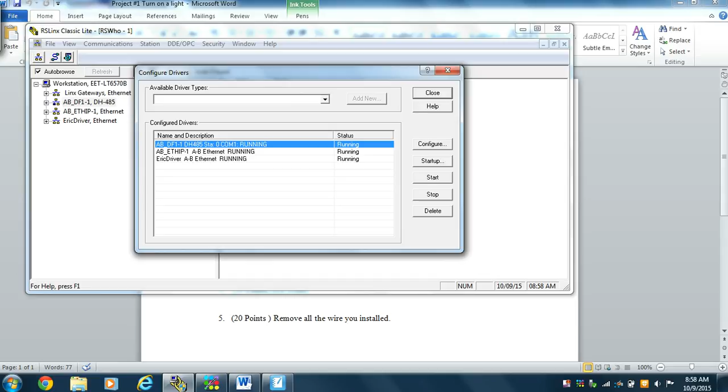Okay, so the first thing we're going to do is establish communications. So we're going to open up RSLinx, which is our communication link. Go to our DF1 connection, go to the squiggly line in the middle, and do an auto configure. And this will configure us to talk to that SLC. Alright, so our automatic configuration is successful, so that's good. We close that. The RSLinx program has to stay active. So we're going to minimize it, but keep it running.

Then we're going to open the RSLogix 500 program. And then, let's see, okay, so I got it. Then what we're going to do is go to communications, who active online. And we're going to click on the 5/03 that we're hooked up to. Obviously I ran a wire up to that guy.

This is a DF1 connection we're doing, and it's channel 1 because I'm talking from this computer directly to that unit that's on a network with another 6 of his friends, but I can only see one of them because I'm coming in from the serial port. Okay, so I'm gonna say OK, and I'm going to create a new file. What this is going to do is bring into my 500 program everything associated with the 5/03 microprocessor that I'm connected to.

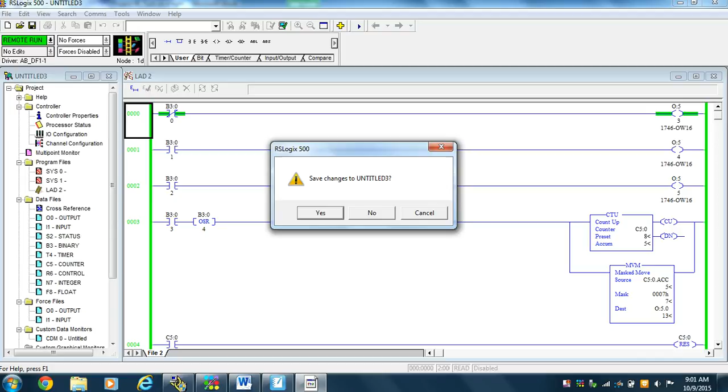And patiently doing so. And currently there is a file there already, and we will go to offline because we want to make a new program. And I'm going to say no. We probably wanted to say yes there. We'll find out. Now I'm thinking about it, but we'll see if no worked.

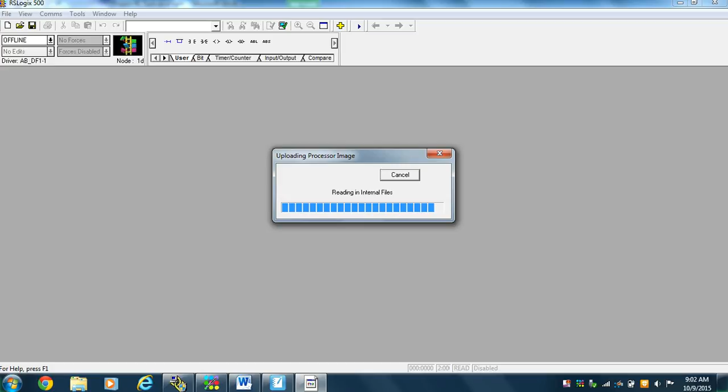Uploading is the process of bringing things from the programmable logic controller into this computer. Downloading is the process of things leaving this computer and going into the microprocessor.

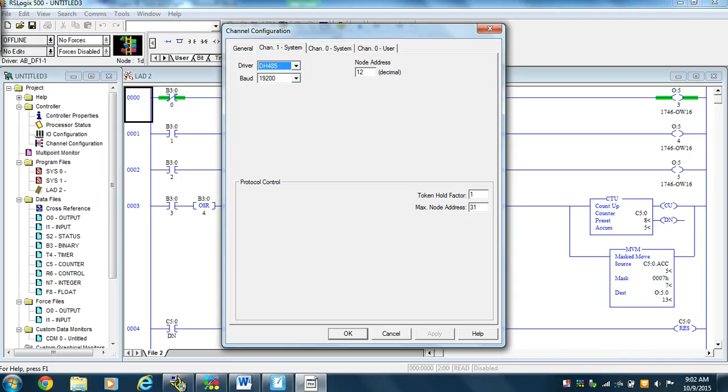Okay, so we're offline. It says that we're channel 1, node 1 for the DF1 connection. That's true. We look at the communications and we look at channel 1 and we see we're node 12, and we look up at the machine we're connected to and it says node 12 because I put a sticker on it that says node 12. And the network is at the awesome baud rate of 19.2K. We're not going to change that.

That's fine. We look at the input-output configuration and we see we have a microprocessor and operating system 302. We have 1, 2, 3, 4, 5 cards associated with those slots. There are a total of 7 slots. The 6th one is empty. I look up and I say, yep, that's right. The 6th one is empty. So that's okay too.

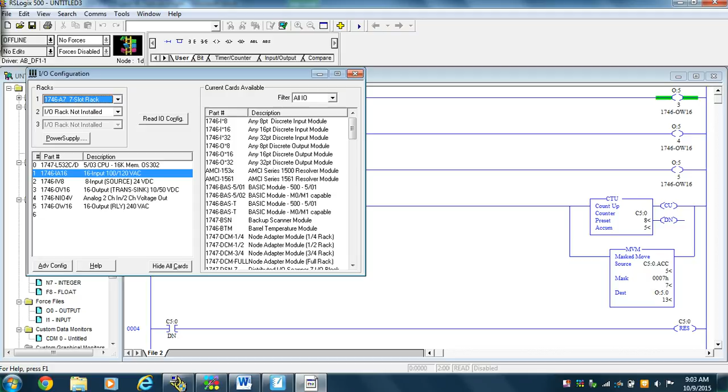And now I'm going to make my program. So I'm going to delete what's there. Maybe I'm going to delete what's there. It's hard to say. Now that it's red, I'm hitting the delete button and I'm deleting the program that's there. I'm going to have one rung. I'm going to make this a little bigger.

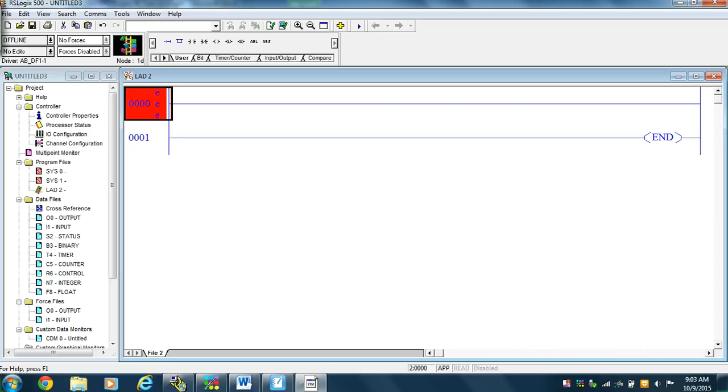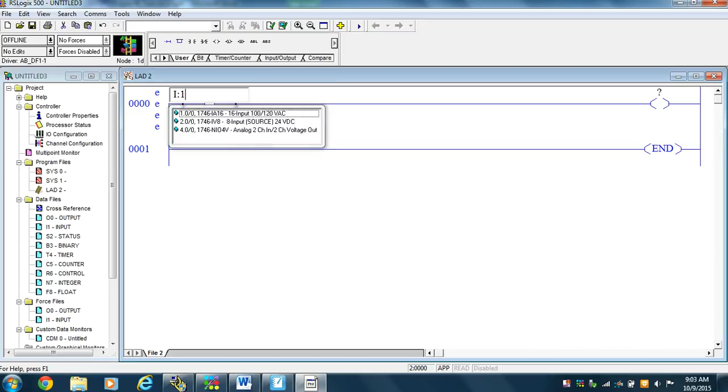I'm going to have some input, turn on some light, so I need an output. I need an address for the input. So I look up and see where I wired my input card, and I see my input card is in slot 1. And I wired it up to input 0. So I want I:1 for the slot I'm in, /0, and that's going to be my input.

And then my output, grab the output. Thank you very much for putting me in the right space. I already have an output, that's why it did that. All right, so I go to my output and I look up and I see that my output card is in slot 0, 1, 2, 3, 4, 5. So O:5/0 is my output.

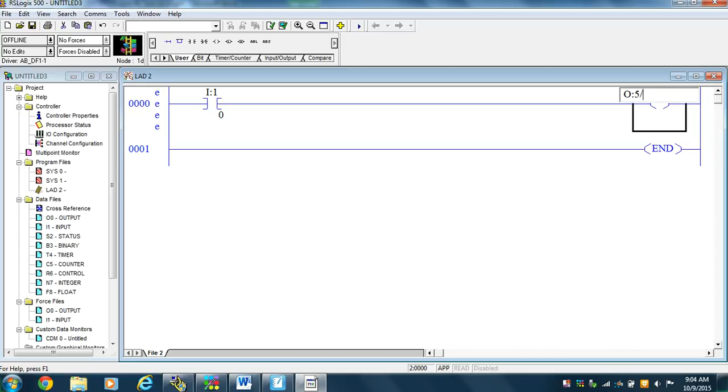I'm going to check for errors. There are no errors. I see that my input's associated with an input card. That's good. And my output's associated with an output card. That is even more wonderful. And my output card is an output relay card for some reason, but that's just the way it is in this guy. Okay. Now I can download the program and run it. When I hit my switch, the light's going to come on.

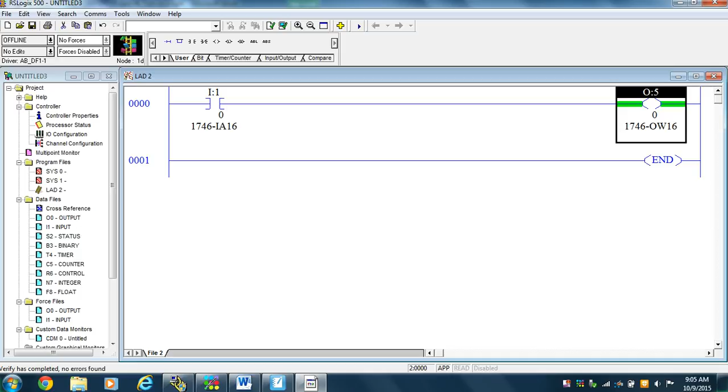Okay, that's fine. I come down and I see that the next thing I'm going to have to do is have the panel view also turn on this light. Okay, well, the panel view can't operate an input. The input can only be operated from an input. The input card, I can force it on, but the panel view won't be able to turn it on. Translated into English, I'm going to need a relay. I'm going to need a binary bit that the panel view can control.

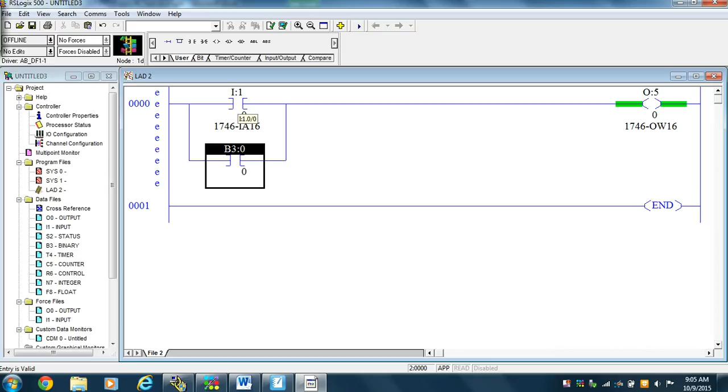B3:0/0. And so that's going to be there for the panel view. So now I'll do a green check here. And then to be consistent, I need to go and label things because labeling is very important. So I'm going to call this something cool like input 0. And I'm going to call this output 0. Clearly, in a one-line program, my descriptors are interesting.

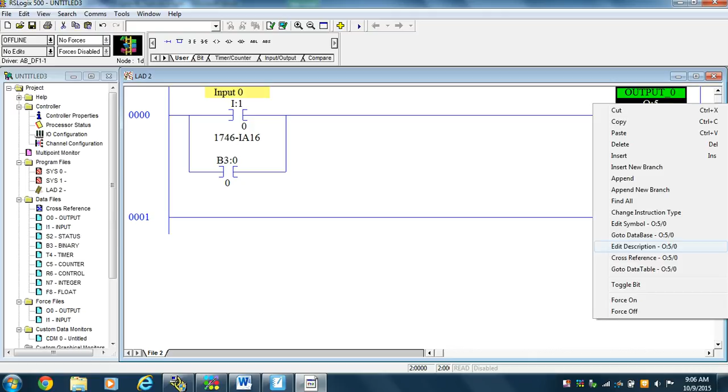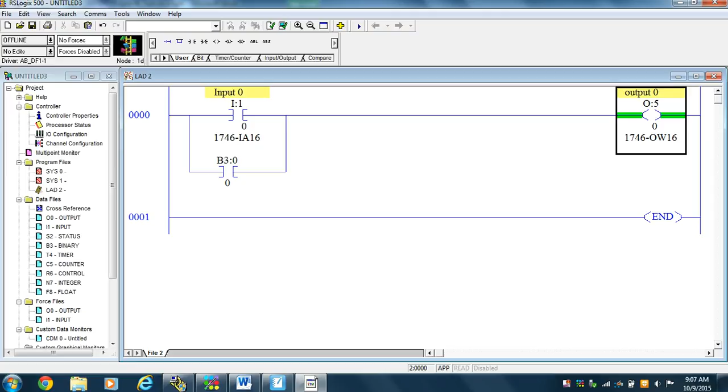Output 0. And why did that happen that way? I don't know. Description, output 0. And then I want to get rid of this green thing where I was labeling the symbol, not the address of the output. And then I'll do a description for the binary bit as panel view.

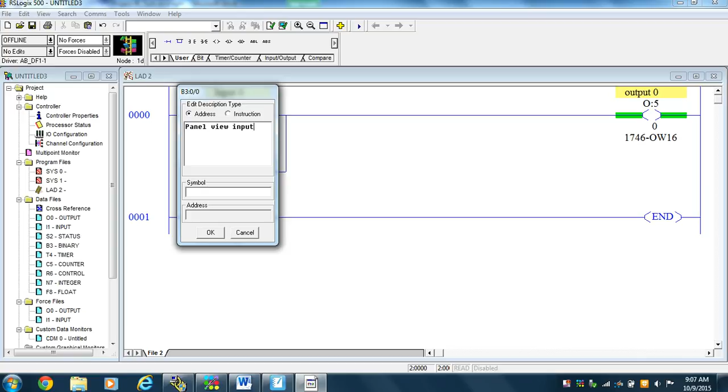I think there's 2 N's maybe. No, I don't think so. Panel. Spelling doesn't count. Input. Okay, so I've done that, and now I'm ready to download the program. And I'll say this is Project 1. Project 1 Doug, if I could spell Doug.

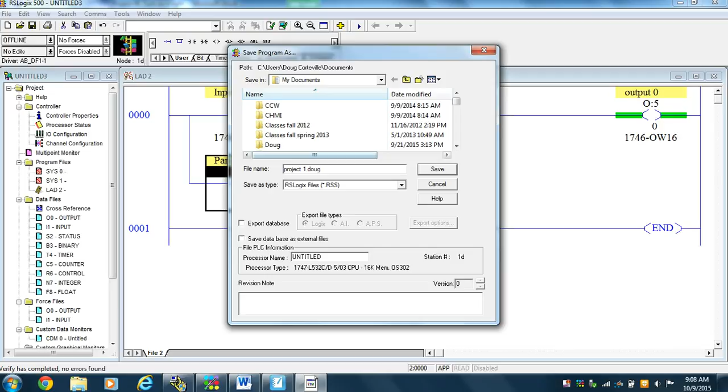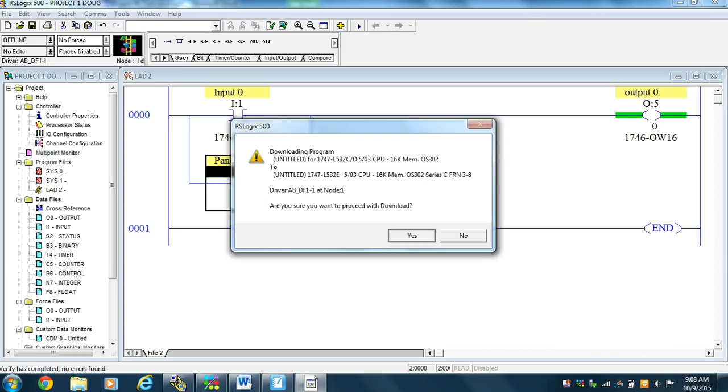And are we downloading? Yes, we are. We're downloading into a 503, and we're writing something from a 503. Now, the guy we're going into is the CD guy, and this guy is telling us that we really have a serial E. I'm not sure why that's happening, but I don't really care because it's going to work. And now I go and my program goes in.

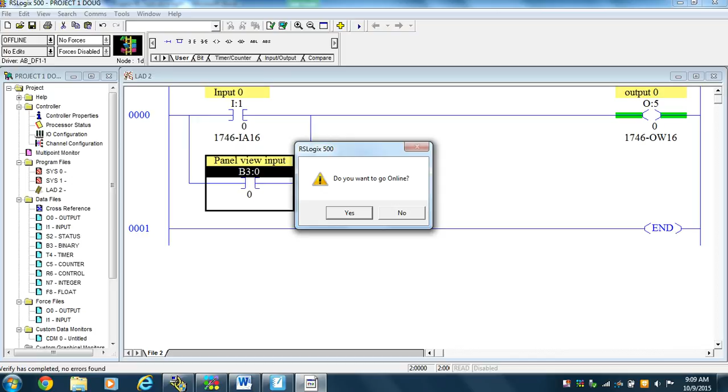And then we go back to run mode. And why in the world is our output on? I have no idea. Oh, I'm not online yet. That's why I have no idea. Okay, so now we're in run. The green output guy is now off because he's not on. If I were to make the panel view turn that guy on, my light would come on.

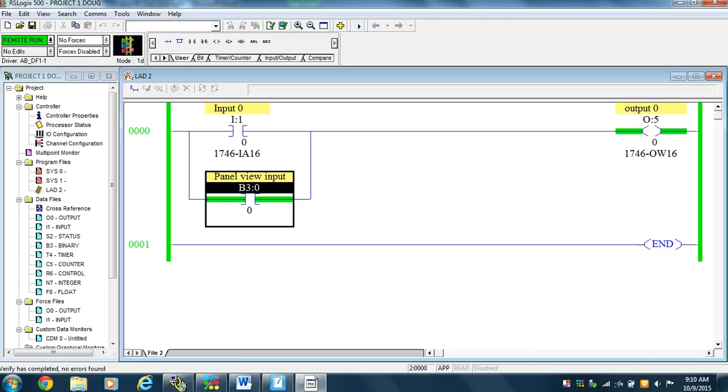And if I were to turn my switch on, my light would come on. Or not. It is being stubborn, isn't it? Oh well, can't have everything.

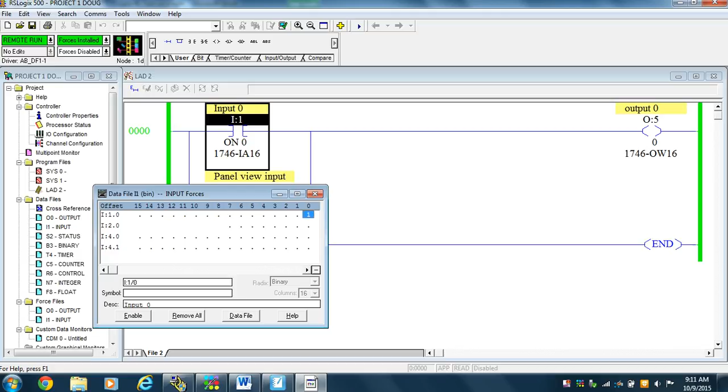That's how I would write the program to do project number 1. You still have the panel view program to write. That should be rather simple. Make sure I'm standing there when you're doing it the first time.